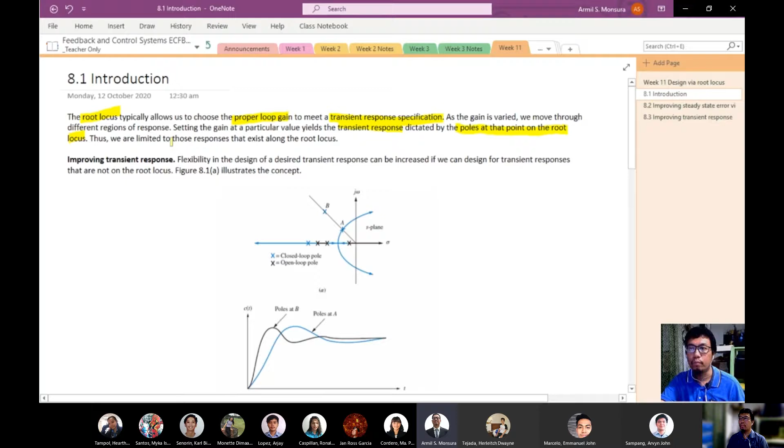However, setting the gain at a particular value yields a transient response dictated by the poles at that point on the root locus. So if we want to set our transient response at a different part of the S-plane, or set our closed loop poles at a point that is not on the root locus, we would not be able to do that. We are limited only to the root locus itself.

So, for example, if we look at improvement in the transient response, we will have the following, or we can see the following. For example, say we want to meet a certain settling time or peak time.

Now, if at a certain value of gain, the location of your pole is here, remember that your closed loop pole, you would only be limited in setting your gain along this root locus.

Okay, so halimbawa ngayon na gusto ninyong mag-meet ng certain TS or TP requirement yung inyong system, then you would be changing your overshoot kasi magbabago this line actually sets that, or along this line your overshoot is constant, or your overshoot is basically constant.

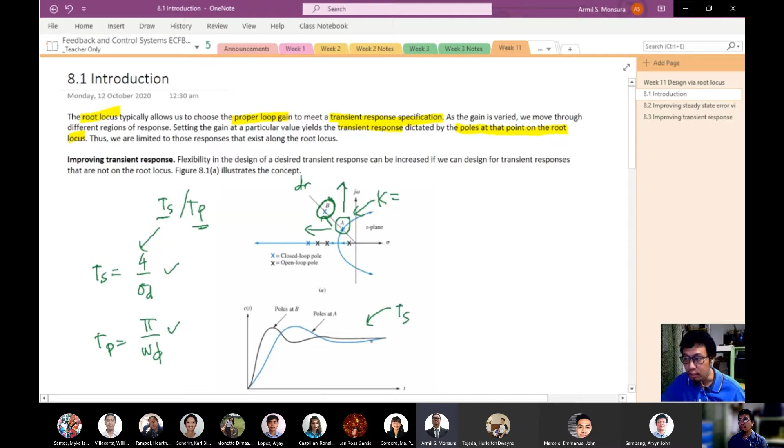Yan, for example, kung titingnan niyo to, in this case, there is an improvement in TS kasi ito yung TS nung sa A. Pero yung sa B, okay, nandito yung TS niyan. So nag-improve yung TS niyan, bumilis yung settling time. Pero makikita nyo na yung kanyang overshoot, halos pareho lang.

Okay, it is possible by moving from point A to point B. Okay, but again, as you can see, point B is not on the root locus. So paano natin ngayon mamimit yung ganong requirements na we improve TS but at the same time we maintain the overshoot?

Okay, so in that case, what we will do is we would need to have your root locus reshaped. Kailangan mabago natin yung shape ng root locus natin. And then, when we reshape your root locus, we would make that root locus pass through that point B. Okay, so hindi lang basta reshape. Pag ni-reshape natin siya, dapat yung bagong root locus na ni-reshape dumaan din sa point B.

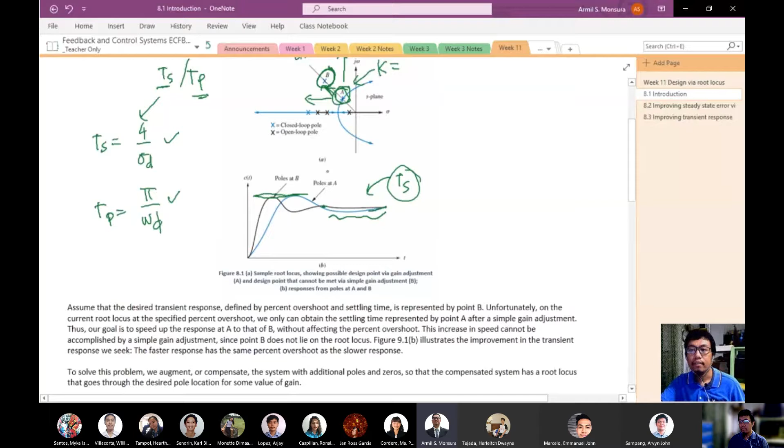And how do we do that? How do we reshape the root locus and then make the root locus pass through a certain point? By the way, tatawagin natin tong point B as the new operating point, and itong point A as the old operating point. So instead actually we can also call that as the complex dominant pole. Pero para mas suggestive siya, or para mas intuitive siya, we will call those operating points where your system is said to be operating on.

Okay, so basically that's the closed loop pole that your system operates on, so that mamimit niya ang certain, say for example, overshoot or certain damping ratio. And then i-redesign natin yung controller natin such that yung operating point na yan, magagalaw natin into a new operating point that would meet our requirements.

Okay, so babalik tayo sa question natin. How do we then move or reshape this root locus and at the same time make the root locus pass through a new operating point? So what we do is we augment, or compensate, the system with additional poles and zeros. So what we will do is we will add open loop poles and open loop zeros sa ating system. Yung open loop poles at saka open loop zeros na yun, doon manggagaling yun sa controller natin.

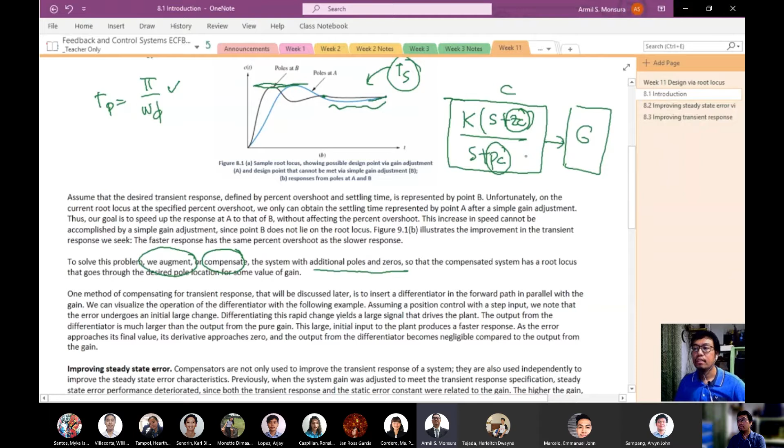Ang steady state error, basically, isang way of actually improving your steady state error is increasing the system type. Take note na halimbawa, if your system is a type 0 system, halimbawa meron kang K over S plus 1 times S plus 2. If you have this system na type 0, alam natin na meron yang error sa step input. Kung gusto nating ma-zero yung ating system or yung error natin o yung steady state error natin due to a step input, what we want to do is to increase the system type of this.

Gusto natin siyang gawing type 1 para magkaroon siya ng integration factor dito. And thus, ito magiging 0, kasi yung kanyang KP mag-i-increase yan up to infinity. So yung improvement na yun can actually be done by adding an integration factor doon sa inyong forward transfer function. So ito, ang mangyayari ngayon dyan is that yung ating controller meron na siyang gain, tapos meron pa siyang integrator.

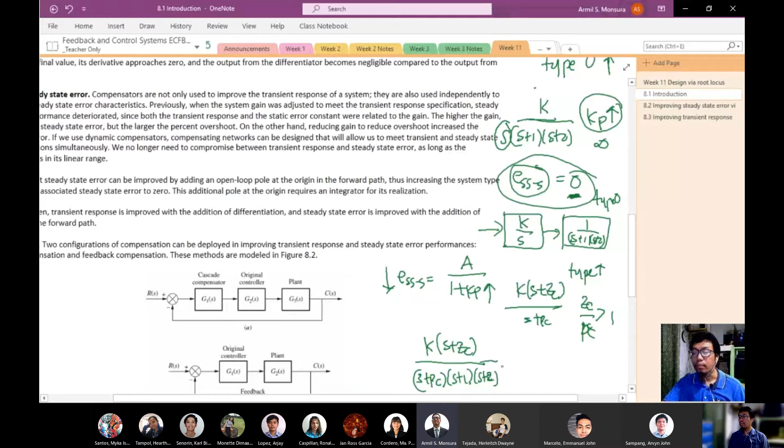Pag kinumpute nyo yung KP nito, that basically is K times ZC over PC times 1 times 2. So kung yung ratio na ZC over PC natin is actually greater than 1, then we can expect an improvement in KP and therefore an improvement in the steady state error performance of your system.

Now, what's a good thing is that mako-control natin kung nasan tong ZC at saka PC natin, so that hindi lang natin siya ma-state as greater than 1. But actually, we can actually set yung value na yan, itong value na to. For example, kung gusto natin ng 10-fold improvement in terms of the steady state error, or in terms of the static error constant, then we can set ZC over PC to be equal to 10, kung gusto natin ng 10-fold reduction, 10-fold improvement in the static error constant.

So kung 10 yung isa-set natin para dyan, then we can choose a location for your compensator zero at compensator pole para maging 10 yung ratio na yan. And therefore, pag kinumpute natin yung KP, there would be a 10 times improvement in the KP. And of course, in terms ng KP at saka ng steady state error for the step input, hindi kasi exactly sila proportional.

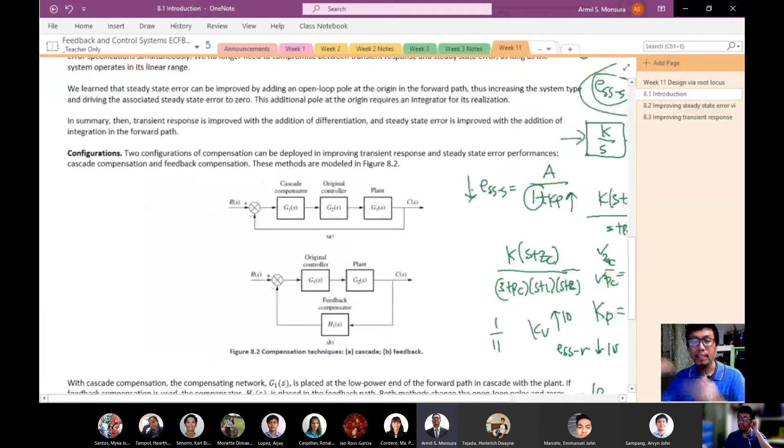Pero sa KP kasi iba yung usapan dahil merong extrang 1 na factor doon. Pero more or less medyo mape-predict natin na pag tinaas mo si KP, bababa si error.

That is how we improve the steady state error. Either we introduce integration factor so that we can reduce the error to 0, o kaya we can introduce poles and zeros, or compensator poles and zeros, para makita natin na ma-achieve natin yung improvement sa static error constant na kailangan natin. So yung mga techniques na yun will actually be discussed in the next sections nung ating chapter na to.

Yung configuration, mahalaga na magkasundo tayo dun sa configuration nung ating system na gustong i-compensate. Actually merong various techniques of doing compensation techniques na available.

Yung isa is yung cascade compensation na tinatawag, in which yung compensator ninyo is basically naka-cascade or naka-series dun sa ating plant. The other one is tinatawag na feedback compensation, in which yung compensator ninyo is ilalagay natin dun sa feedback loop.

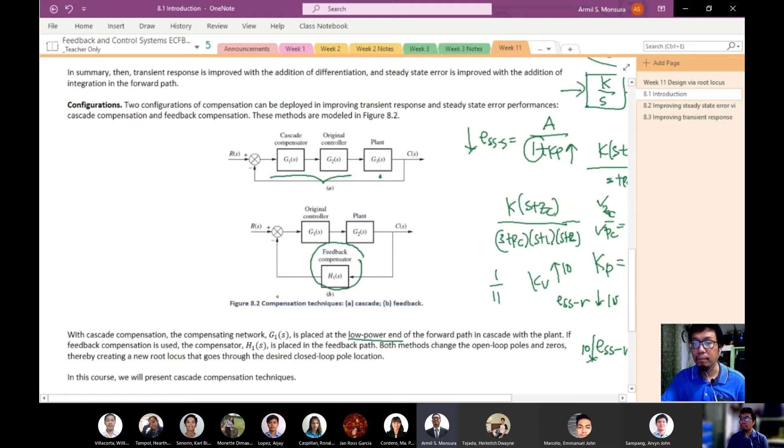Now, in this lesson, we will be limiting ourselves to cascade compensation techniques. And again, paulit-ulit ko na sinasabi sa inyo ito, yung tungkol sa topology na gagamitin natin. So again, we will be using yung topology na pinakita ko sa inyo before pa, in which ang i-design natin doon is yung compensator na nasa tabi ng ating plant.

Compensators na gumagamit ng pure integration for improving steady state error, o pure differentiation for improving transient response, ay defined as ideal compensators. Pwede natin gamitin yung ating pure integrator, okay, yung integrator at yung ating differentiator, to be able to improve steady state error para sa integration o integrator, at saka transient response para sa differentiator.

But these compensators are only implemented using active networks. Yung ating integrator, yung 1/s natin na system, at saka yung ating differentiator, yan ay na-i-implement lang in circuit using active networks. So mai-implement lang natin yan using op-amps.

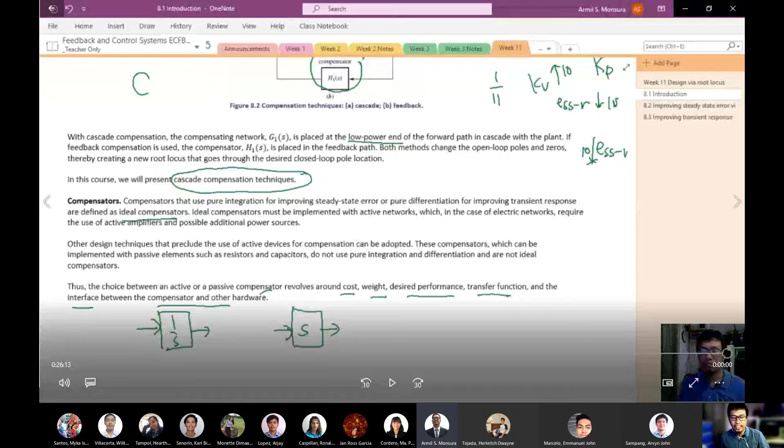Bago ko mag-proceed dun sa next part ng video, gusto ko lang bigyan kayo ng parang pinaka-preview kung ano yung aabangan natin dito sa next lesson natin na to. Basically, mag-aaral tayo ng design ng anim na compensators. Paano i-design yung anim na compensators? Para medyo may idea din kayo kung saan patungo itong discussion natin.

Ang hirap mag-drawing ng straight line sa ayan.

Tama ba itong ko? 1, 2, 3, 4, 5, 6.

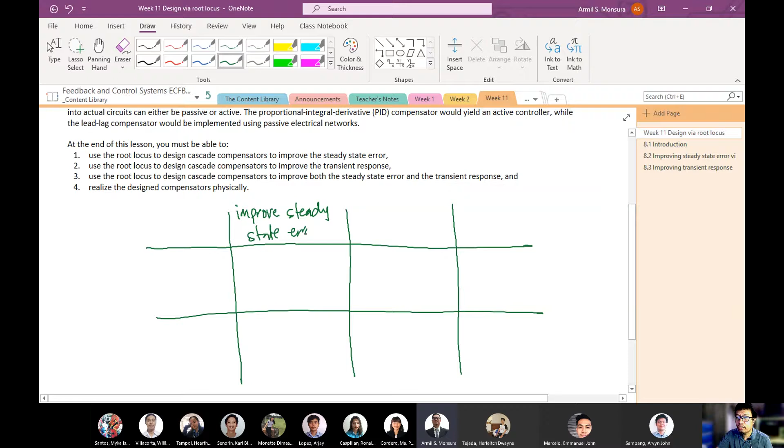Okay, so sa una, mag-aaral tayo kung paano i-improve yung steady state error. Tapos, aaralin natin kung paano mag-improve ng transient response. Okay, and then aaralin natin kung paano mag-improve ng sabay, steady state error plus transient response. Okay, so una, pag in-improve natin yung steady state error, yung transient response basically the same as the uncompensated.

Okay, so parang i-improve lang natin talaga yung steady state error. Pero yung transient response, kung ano lang yung original na transient response niya nung wala pa siyang compensation, yun pa rin siya.

Okay, sa improvement naman ng transient response, wala tayong pakialam kung anong mangyayari sa error. So generally, when you improve the transient response, there must be a certain improvement also in the steady state error performance. Magkakaroon din siya ng improvement, kaya lang hindi natin kontrolado. Okay, hindi natin controlled kung gaano kalaking improvement sa steady state error yung mangyayari.

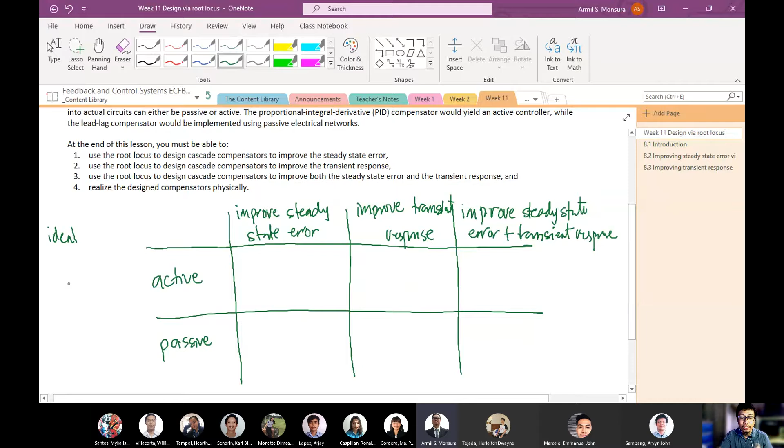Okay, tapos yung isa naman, type ng compensator na yan natin is yung passive. Okay, ito yung purely hindi siya gagamit ng op-amp, o kaya pwede siyang gumamit ng op-amp, pero yung characteristics niya hindi katulad doon nasa active, o hindi ideal yung compensation na magaganap. Okay, pag sinabi niyo kasing ideal yung compensation, ulitin ko, pag sinabi niyo ideal yung compensation, you are able to put in a pure integrator.

Okay, pwede kayo maglagay ng pure integrator o kaya ng pure differentiator. And when you say pure integrator, you are able to put in an open loop pole sa origin. Okay, pag pure differentiator naman, you are able to put in an open loop zero dun sa origin. Okay, so yun yung tinatawag nating pure integrator tsaka pure differentiator, at magagawa lang natin yan kung meron tayong active circuit. So yung ideal compensation can only be achieved via active networks. Okay, naintindihan yun?

Now, if your network or if your compensator does not require the use of integrator or differentiator, okay, pwede natin siyang i-classify under ng passive. Okay, again, pag hindi gagamit ng ideal integrator or ideal differentiator, yung controller ninyo or yung compensator ninyo, pwede natin siyang i-classify under ng passive. Whether or not gagamit siya ng op-amp, kasi may mga passive compensators tayo na gumagamit ng op-amp. Okay, gagamit siya ng op-amp pero hindi siya gagamit ng integrator or differentiator. Okay, so pwede natin i-classify yun under ng passive.

Now in this section, we will now try to improve the steady state error of feedback system using cascade compensation. Ang objective natin dito is basically we want to improve the steady state error without changing essentially the transient response. So basically, we will be having a system having an improved error performance, but having the same transient response as the uncompensated system. There will be two techniques na ating pag-uusapan. We will first discuss a technique wherein we will reduce the error to zero.

For us to do that, we would be using the ideal integral compensation. When you say ideal integral compensation, you would use an integrator - gagamit tayo ng pure integrator dito. When you use an integrator, you would be actually increasing the system type of your system. I-increase natin yung system type, so from a type 0 system, for example, magiging type 1 yan dahil magkakaroon na ng isang integrator dun sa forward path niya, or madadagdagan ng isang integration factor dun sa forward path niya. Therefore, the system type would actually be increasing. And again, if we have an increased system type, for the same test input, yung error mo mare-reduce bigla sa zero. So that's one way of reducing your error to zero. But again, the use of integrator would actually require you to use active circuits.

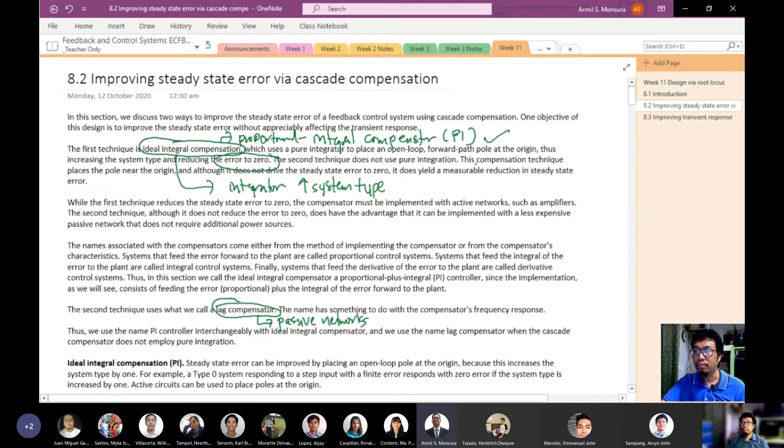Okay, the name of the lag compensator is actually stemmed from its property kapag tinignan niyo yung kanyang frequency response. Another name that we can use for the ideal integral compensator is yung tinatawag nating proportional integral compensator, or PI compensator. Kung maalala nyo, binanggit ko sa previous section na meron tayong PID or proportional integral derivative compensation, o controller. Dito, ang gagawin natin is isa-isahin natin siya: proportional integral, proportional derivative, at yung tatlo, proportional integral derivative. So yun din yung tawag natin, yun din yung ideal integral compensator natin. So we will discuss both approaches, itong PI compensation at itong lag compensation, and see how they can actually improve yung ating error performance.

Okay, sa ideal integral compensation o sa PI compensation natin, the steady state error can be improved by placing an open loop pole at the origin, basically because it would increase the system type by 1. At saka, kasi what would happen is that pag naglagay kayo ng open loop pole sa origin, that would also change the shape of your root locus.

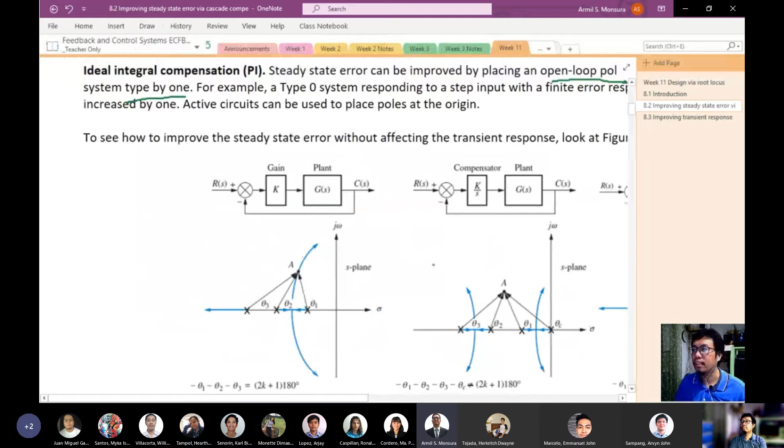Okay, so ngayon para bumalik siya sa dati at para yung root locus ninyo would actually operate on the same operating point na meron siya before the open loop pole was added at the origin, lalagyan natin siya ng open loop zero na malapit dun sa open loop pole na nilagay niyo sa origin. So that would mean na since malapit yung open loop zero at saka yung open loop pole, magkakaroon yan ng tinatawag na pole zero cancellation. I'm talking about this part. Kung halimbawa na ito yung original operating point niyo or your system operates at that complex pole, once na maglagay kayo ng open loop pole sa origin para i-increase nyo yung system type, may iba yung shape ng root locus niyo. So ito na yung dinagdag na compensator pole.

So may iba yung shape, mawawala dito sa part na to yung root locus niyo. Ibig sabihin, may iba na talaga yung performance niyo kasama yung transient response. At again, ang objective nga natin is for us to just correct the error and not change the transient response. Pabawiin natin yan by actually placing an open loop zero na malapit dun sa open loop pole na nilagay natin sa origin. Kasi kapag naglagay kayo ng zero na malapit dito, essentially, you are employing yung tinatawag nating pole zero cancellation. Itong dalawang ito cancels each other out. So therefore, sa root locus, hindi masyado mararamdaman yung pagkakaiba ng epekto ng dalawang yan, kasi halos nagka-cancel sila with each other. Therefore, yung shape ng root locus nyo, babalik sa dati.

At then, ma-force ninyo o ma-set ninyo ngayon na yung system ninyo to actually operate back on this point A. So, for us to be able to design yung ating compensator, para sa transfer function essentially of a PI compensator, okay, o an ideal integral compensator, meron kayong gain times s plus zc, divided by s. Yan yung transfer function ng isang proportional integral compensator. So i-take note nyo yan, kasi later on, kapag sabay-sabay yung dinidesign natin, baka mahirapan na rin kayo hanapin kung nasan yan. So sana meron kayong naka-ready na summary dyan. Maliwanag yun?

Okay, so let's continue.

So s represents the open loop pole at the origin, and zc must be an open loop zero that is close to the open loop pole at the origin. So the value should be close to it. If your pole is at 0, the value should be at 0.1 or 0.01. The nearer that zc is to the origin, the closer your performance will be to the transient response performance of the uncompensated system, but at the same time your error is reduced to 0.

So we now take a look at an example to see clearly what the effect is of placing an ideal integral compensator, or a PI compensator, on your system. So first, in this case, we'll use the CSD app, or the Control Systems Design app of MATLAB.

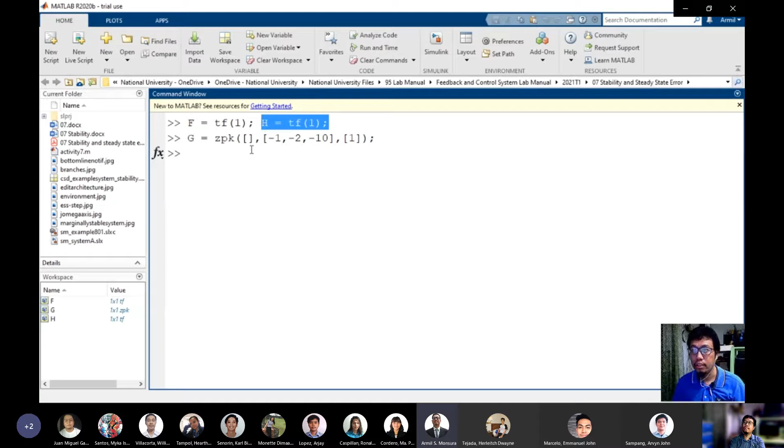So we started with defining your system in the MATLAB workspace. So our F is 1 - I explained this over and over again before - our F is 1, our H is 1, then this is your forward transfer function. That excludes k, because the k we will place in our controller design.

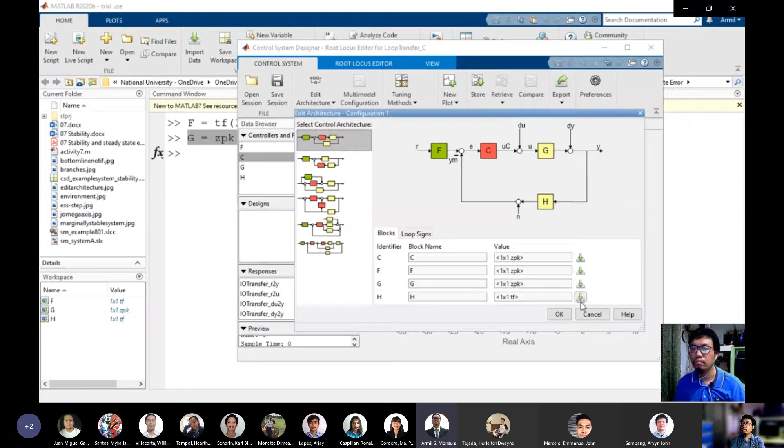So what we will do next is to import this into our CSD app, by choosing edit architecture, then editing this edit architecture. Once this pops out, we import F, then import G, and then finally import H. So we press OK, and then we wait for the system to update the architecture.

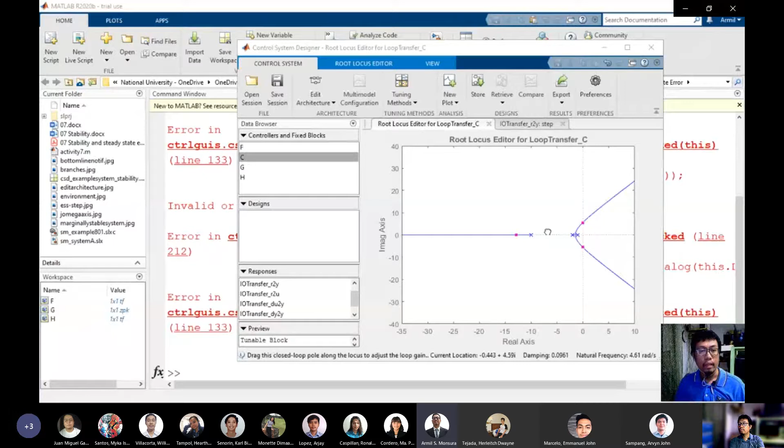So we now have the following as the root locus of your system. Take note that we have open loop poles at -1, -2, and -10. So we expect that we have three branches. And then what we want to do next is find the operating point.

Now the operating point is set by the given damping ratio. Our problem states that we want this system to operate with a damping ratio of 0.174. That means your complex poles would be along the damping ratio line of 0.174. So we can set that here.

By having your design requirements - right click, then design requirements, then new. Then we set the damping ratio at 0.174. We press enter so it registers, then click OK. So this is where the intersection of this damping ratio is - this is your damping ratio line, your DR line.

So we would want now to find the operating point. We would like our closed loop pole to be on the damping ratio line. So what we'll do is set the pole on this DR line. So we drag it there - this is our closed loop pole, the pink dot. We drag it towards here.

Until it intersects, so we check that our damping ratio is now at 0.174. So let's make sure that they're really intersecting. Just a bit more. So let's say that's the intersection we're looking for.

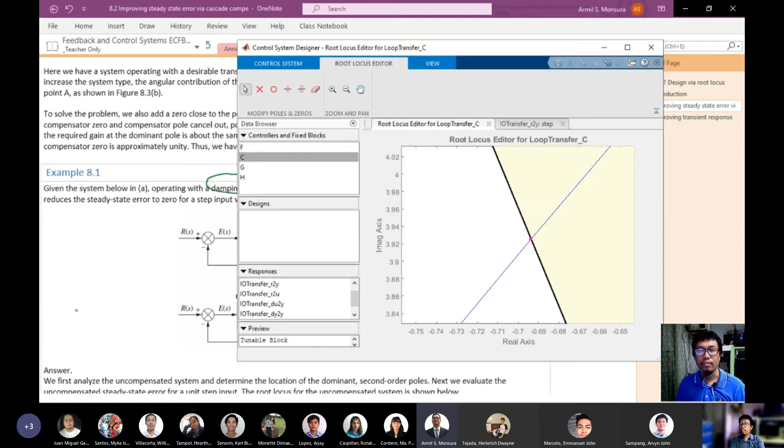So let's take note of the current location that's indicated. So in this case, the current location of our pole is at negative 0.694 plus or minus 3.93j. This might be different from our lecture because of course the actual work we're doing now is different from what I did before. Here I got it at negative 0.694 plus or minus j of 3.92, so that's 3.93.

So let's assume I'll be working on this actual one, what I'm doing now. In that case, anyway, the difference between them is small. That's it.

Konti lang naman yung difference nila. Okay.

So yeah, so we have it at, ipagpareho na natin siya. Okay. So this is negative 0.694. Negative dito kasi naka-positive siya, so let's make this negative. Okay, so this is negative 0.694 plus or minus J 3.92. Okay, so again, ang damping ratio niya 0.174.

Okay. Now for that location, we take note that the gain, okay, that the gain of your is at 164.44. Okay? So nasa 164.44 yung ating K. Okay? So in that case, we would be able to compute now the static error constant for that.

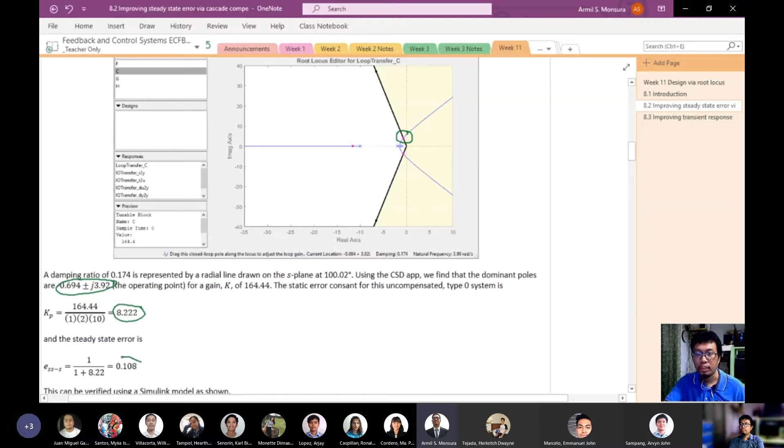Alam ko saan ko kinuha yung formula ng KP.

Naintindihan kung paano ko kinompute yung KP para dito? Oh, ayun. Saan ko kinompute, saan ko kinuha yung formula ng KP? Or in the first place, paano ko nalaman na formula ng KP ang gagamitin ko?

Okay. Tapos, pero paano ko muna nalaman na KP yung kukunin ko? Kasi tatlo yun eh, KP, KV, at saka KA. Paano natin nalaman na KP yung kailangan kong kunin?

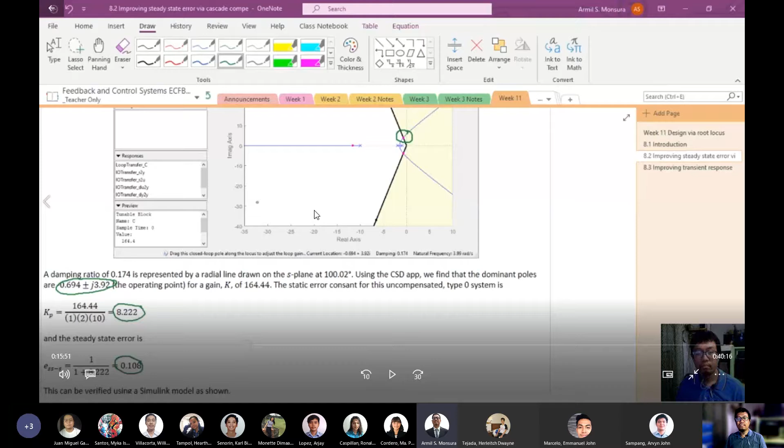Okay, so that's it. 0.108 is our error. So we may be able to verify that with a Simulink model.

So what you can do here is export this model. Once you've done this, you can actually export the model as, or create a Simulink model out of this.

Also, don't forget to export the tuned block. Let's export it as CU. So let's check this, the model C. Let's export it as CU for the uncompensated controller. So let's export it.

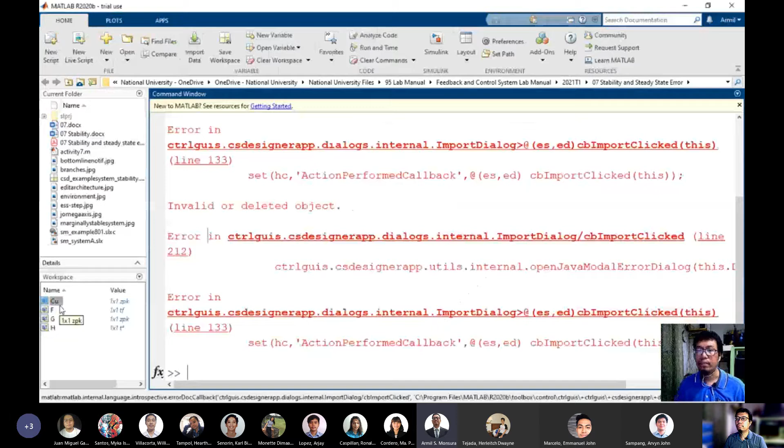And then let's export this as a Simulink model. So it would ask something like, do you want to, doing so will overwrite any variable in the MATLAB workspace with the same name. So let's just let it overwrite itself, since it's all the same anyway.

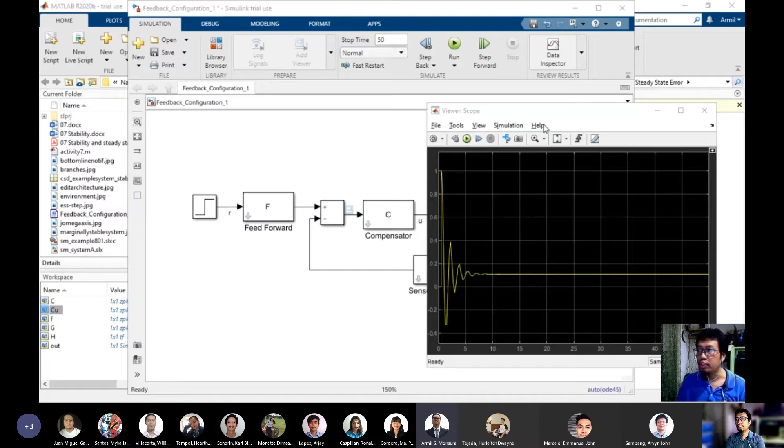So there. So these are the results of our simulation, in which now let's measure the steady state error from here using the cursor measurements.

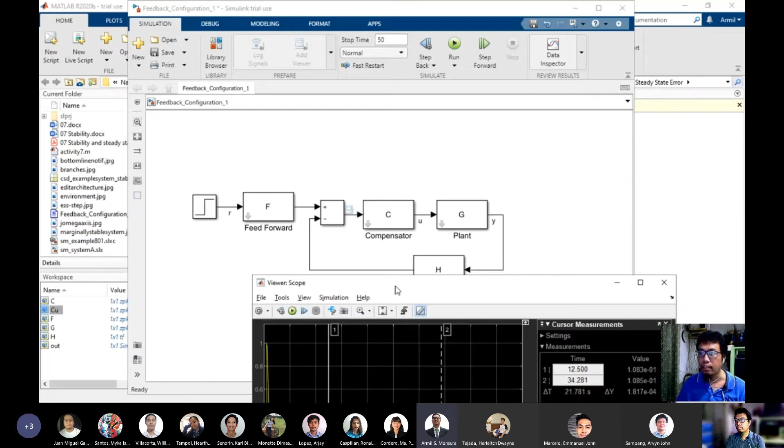You'll see here in our block or in the model that this viewer actually probes the error signal. So this is the error signal, in which we are now on the steady state part of our error signal, and we measure it using cursor 2.

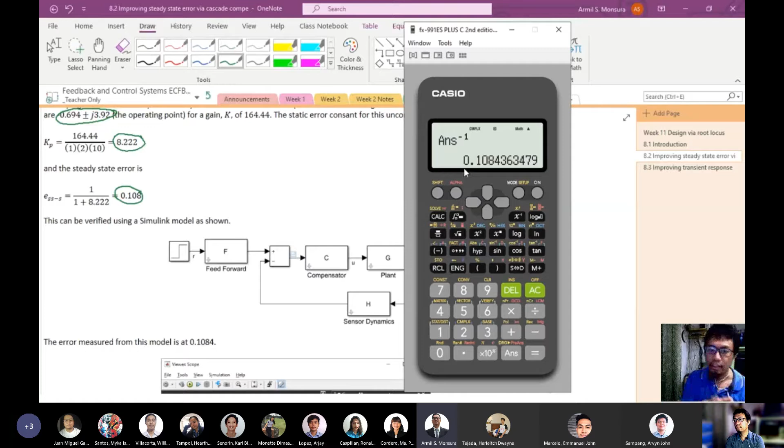So we see that what we measured is 0.1085. The computed error we got here is 0.108, or actually it's 0.1084. So pretty close, our computed value and our measured value.

Okay, so that's it too. Now, what we will do now is we will try to compensate the system by placing a compensator zero at 0.1 and a compensator pole at the origin.

So again, in terms of root locus, that would serve as, the pole would increase the system type. And then the zero here would actually cancel the effect of the open loop pole on our root locus.

So essentially, returning the root locus back to its original form. So we do that by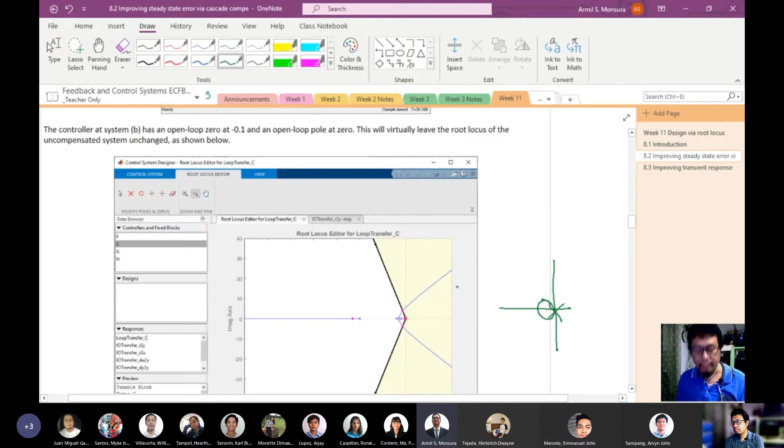going back to our CSD app. So let's zoom it again. Let's zoom out.

And then let's edit the compensator. So in this compensator editor, let's add an integrator, which is basically the pole at the origin, that's an integrator.

And then let's add, right click again, let's add a zero, a real zero. And let's change the location, let's set its location to negative 0.1. So press enter, so we'll have a zero there.

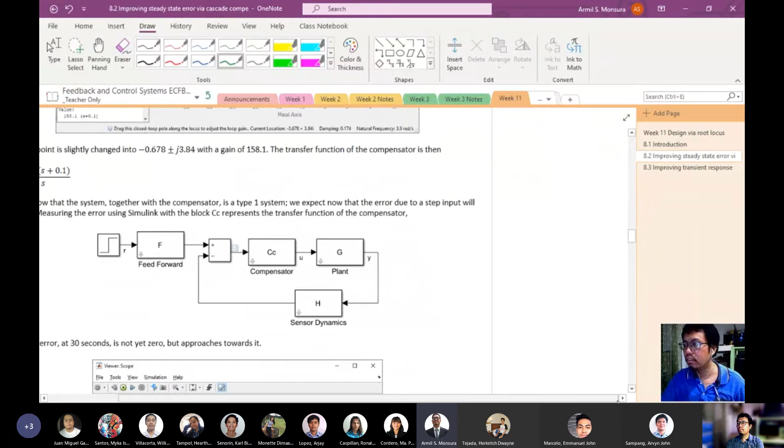Let's make a new block here. Okay, so this is 1. Then this is 158.1 times S plus 0.1 divided by S, that's your C. And this is 1 over S plus 1 times S plus 2 times S plus 10. And then this is 1, our feedback. Negative, positive, this is your C.

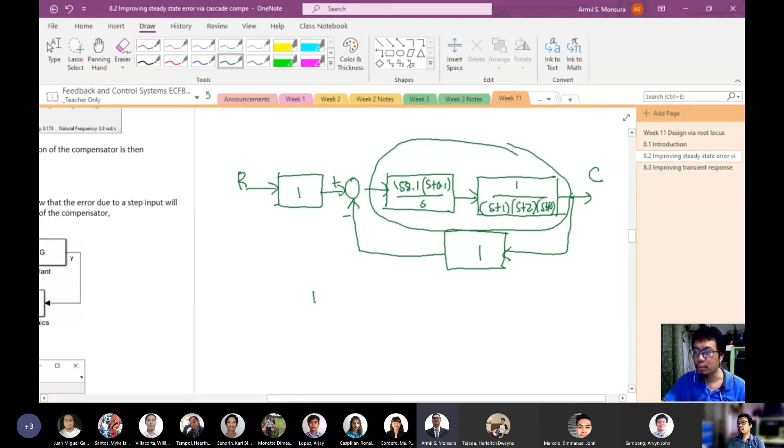Now take note that when we combine this, since this is the forward transfer function combining the two, we would be able to note that it becomes 158.1 times S plus 0.1 divided by S times S plus 1 times S plus 2 times S plus 10. Take note that the system type increased because it now has a pure integration, so it became type 1.

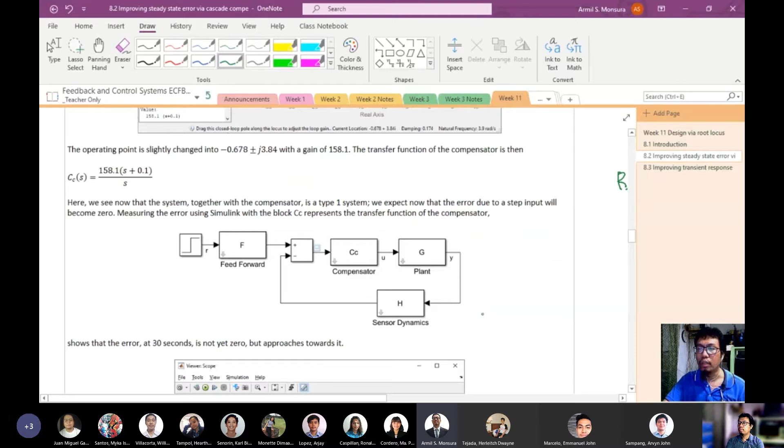So now we expect that when we measure the error, if you verify this now using Simulink, you will be able to see that the error is actually 0. In our measurement here, it hasn't approached 0 yet, but you can see the error going down. So we're expecting that after some time the error will totally become 0.

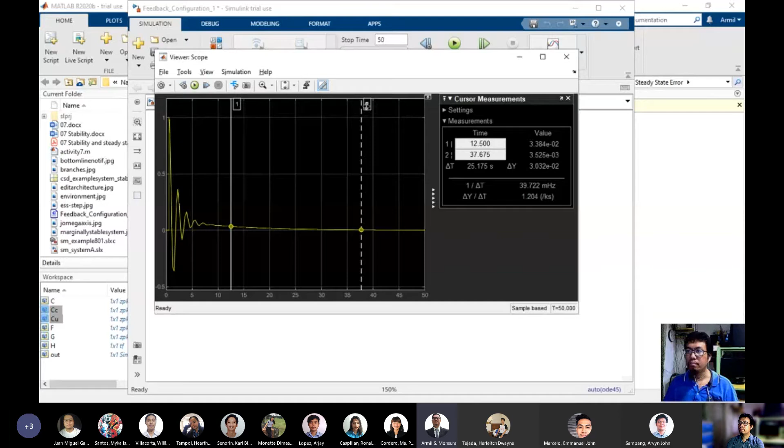Here's the thing, we really do not expect the error signal to completely become zero, since these are actual systems. So if you really look at the actual system, the error doesn't truly go to zero. But the fact that we see in our simulation that the error is actually approaching 0 means we are heading toward the point where the error truly becomes 0.

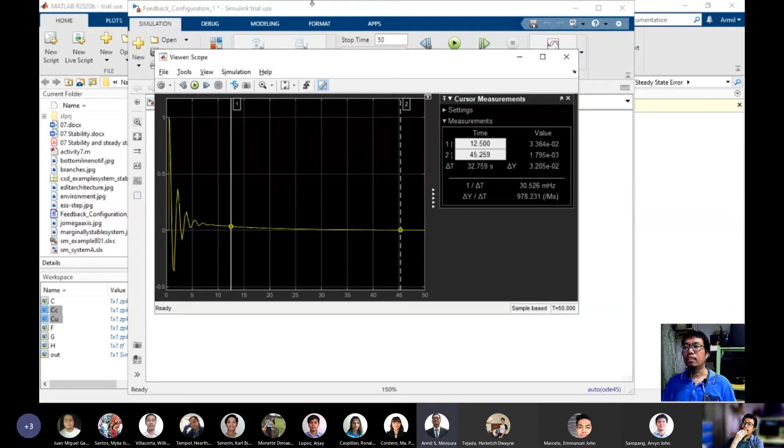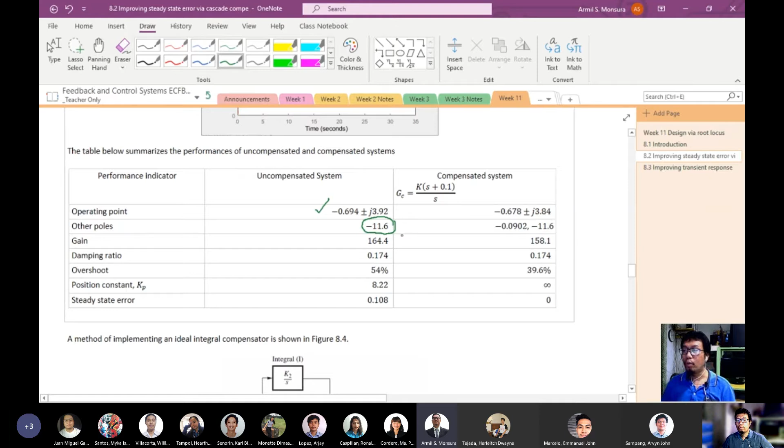We expect another pole which is at negative 11.6. You can get that if, for the uncompensated system, you put your cursor at that point, you would see that you get negative 11.6 as the third pole. And on the other side, we see the other poles are at negative 0.0902 and negative 11.6.

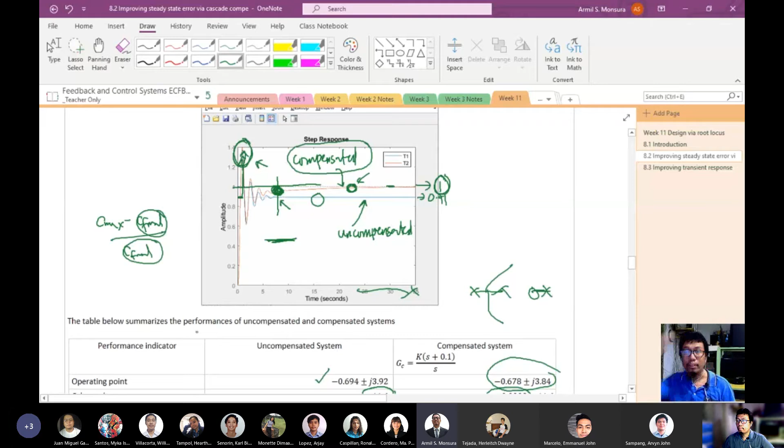Now the position constant, KP, is essentially 8.22 for our original. It becomes 8.222 for our uncompensated system. So that's 8.222, and it becomes infinite for the compensated system because we now have an integration factor in the forward transfer function, so it becomes infinite. Which means your error is now reduced to 0, from 0.108 it becomes 0.

That's how we compare performances of the uncompensated system and the compensated system. Now, how do we implement an ideal integral compensator? In terms of block diagram, you can implement it using a parallel combination of a pure gain and an integrator block.

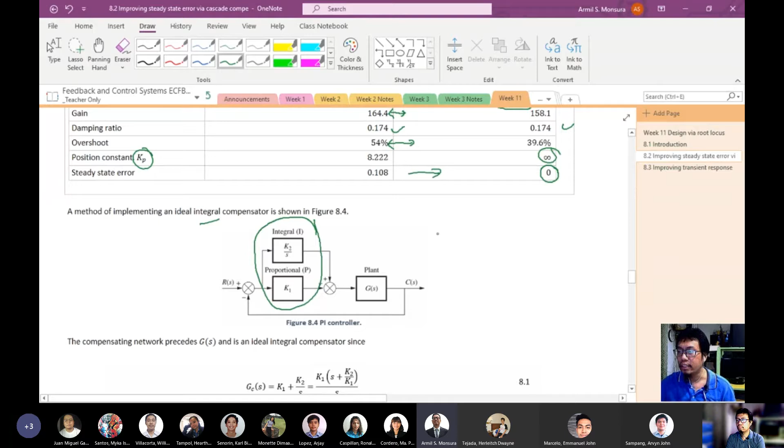What we got is basically 158.1 times S plus 0.1, divided by S. So now here you have basically this, this is it. The K we use here to describe the gain is basically this. But if you do it in parallel, to get individually the K1 and K2, we spread it out. So basically this should be 158.1 over S, plus 15.81.

Wala pa lang over S to. Kasi S over S, magka-cancel out sila. So 158, that is basically just 158.1. Plus 15.81 over S. Ibig sabihin, meron kang pure gain na 158.1, tapos meron kang integrator gain na 15.81. So that's how we implement it in a block.

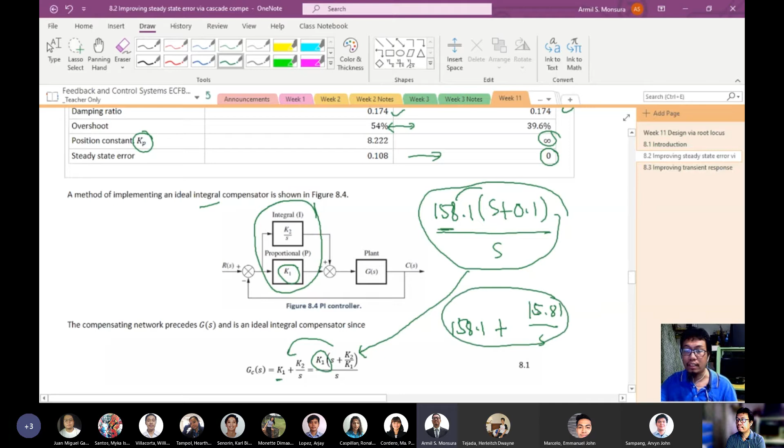Later on, we will be able to implement this in a circuit. Meron tayong table na gagamitin para malaman natin kung paano natin i-translate itong transfer function na to sa isang active circuit. So that's how we design your proportional integral controller.

Now the next, may question doon sa part na yun para sa proportional integral controller. Okay, so mukhang wala naman. Okay, so let's continue. Andiyan pa ba kayo? Baka mamaya wala na kayo diyan. Okay, so sige, tuloy natin.

Pang-correct natin or pang-reduce natin ng error is yung tinatawag nating lag compensation. So dito sa lag compensation, hindi natin ma-achieve talaga yung zero error, kasi hindi tayo makakapag-implement ng integrator without the use of active circuits. So kung purely passive circuits lang yung gagamitin natin, hindi tayo makakapaglagay directly ng pole sa origin, kaya medyo iuusad natin ng konti yun from the origin.

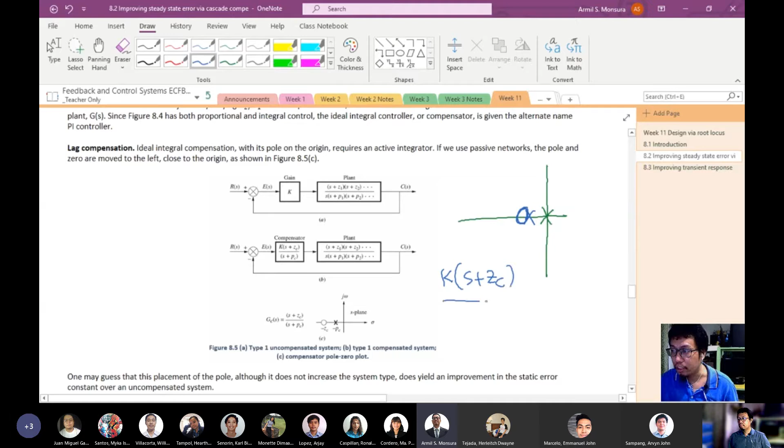Ang makikita natin dito is that kung meron kang active integrator, makakapaglagay ka ng pole dito. Pero this is not possible kung meron kang passive circuits lang, so medyo ilalagay natin siya ng konti dito. Tapos the principle is, medyo i-cancel natin siya using a zero na malapit sa kanya. So that is why, kailangan natin when we design a lag compensator is kailangan natin mag-specify ng compensator zero at saka ng compensator pole.

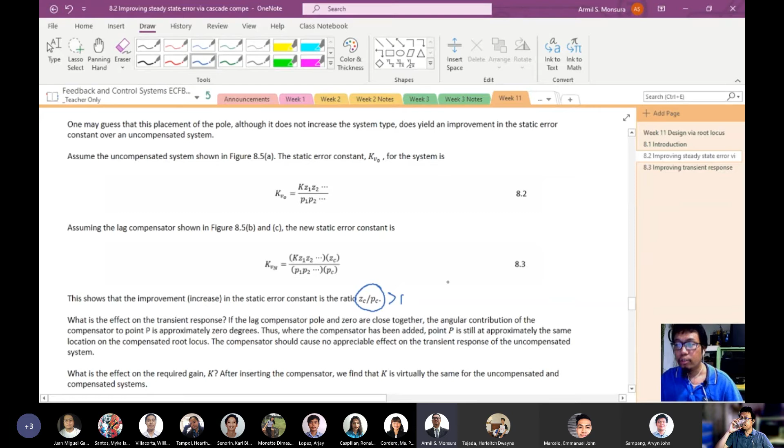Ang requirement nito is that we would like our ZC and PC to be as close as each other, pero kailangan yung ratio ng ZC over PC natin ay greater than 1, kasi yun yung magiging improvement natin. This would be the improvement that we need in order to increase the static error constant, and therefore decrease the error. So again, we say na yung ZC over PC is the improvement in the static error constant na we require.

So that we would be able to increase the static error constant by this factor, and therefore we would be decreasing the error, we would be reducing the error by a certain factor. Kung ganun, ibig sabihin nito, dapat si pole natin mababa to sa 1, kailangan medyo malapit to ng konti sa origin, kasi dapat mababa yung value niya. Kung mababa yung value nito kesa dito, what would happen is yung ratio nila would actually be greater than 1. Say for example, kung ang pole ninyo ay nasa 0.1, ilalagay natin ito as nasa 1.

So we will have a ZC over PC ratio natin, may improvement na tayo sa error natin. Yung pole natin, medyo malapit sa 0, malapit sa origin, tapos yung zero natin nasa 1, so nasa kaliwa siya ng compensator pole natin. As this goes near the origin, mas malapit siya sa origin, mas mapapaliit pa natin to. So dapat mas malaki si zero kaysa kay pole, tapos si pole dapat mababa sa 1 at malapit siya sa origin. Yun yung requirement ng transfer function natin dito, ng compensator zero at compensator pole natin.

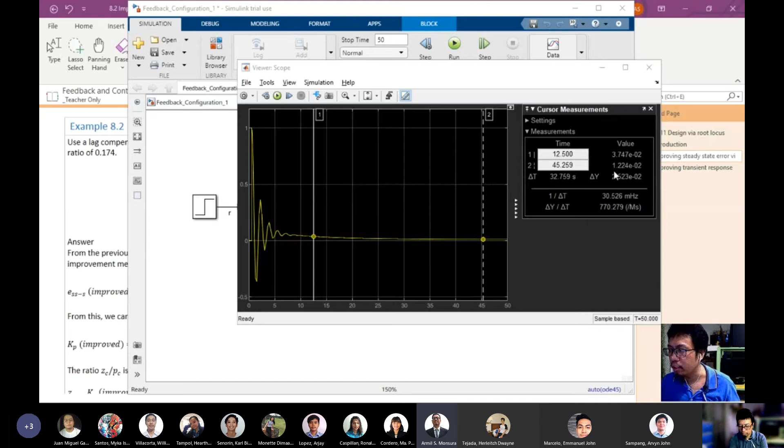So from this measurement, again using the cursor, I'm looking at cursor 2 because this one is more settled, more at steady state. The error is 0.0122. Compare that to 0.0113. So the error that we measured is 0.0122.

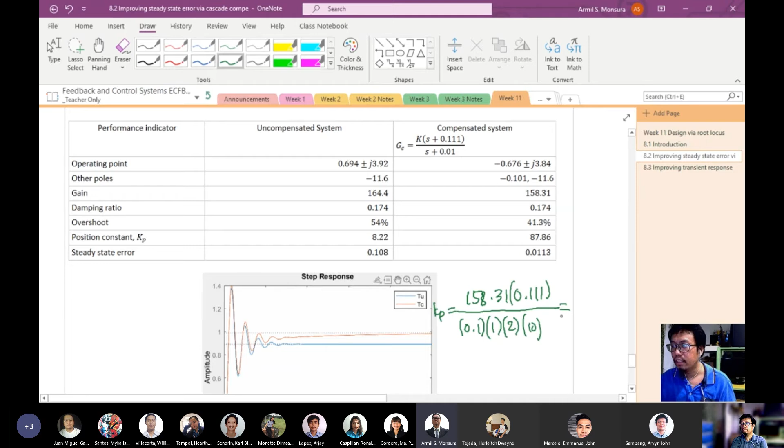Now if you actually compute it, when we compute this, our KP becomes 158.31 times 0.111, okay, divided by 0.01 times 1 times 2 times 10. That would be our KP. So when we compute that, that should become 158.31 times 0.111 divided by 0.01 times 1 times 2 times 10. So 87.86.

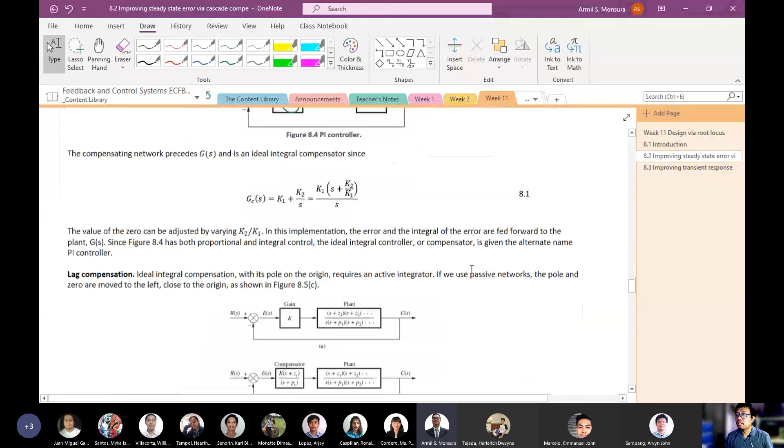Basically, because your system already has compensation, what happens to your forward transfer function is this: your compensator has the transfer function 158.31 times s plus 0.111, divided by s plus 0.01. That's for this part. Then your plant is this. So when we cascade them and look for KP, since KP is basically the limit of G as s approaches 0, that G is basically your whole forward transfer function.

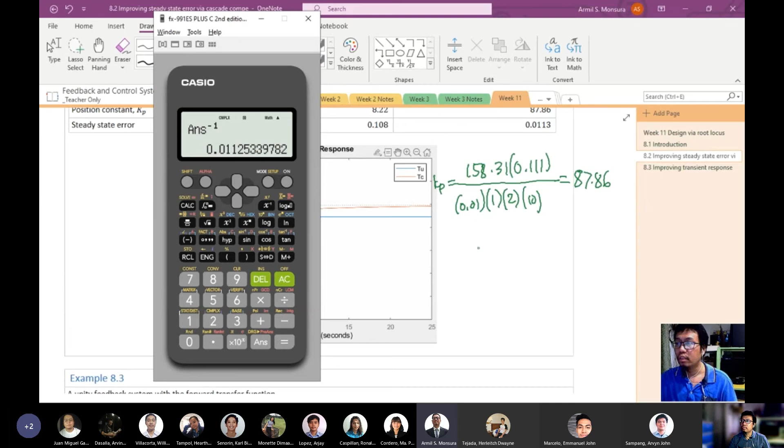So when we fully compute the error, it's KP plus 1, and then we invert it. Your error is 0.0112, that would be your steady state error for a step signal. So our target is 0.0108. That's the computed value. And our simulated or measured value from the simulation is around 0.0131.

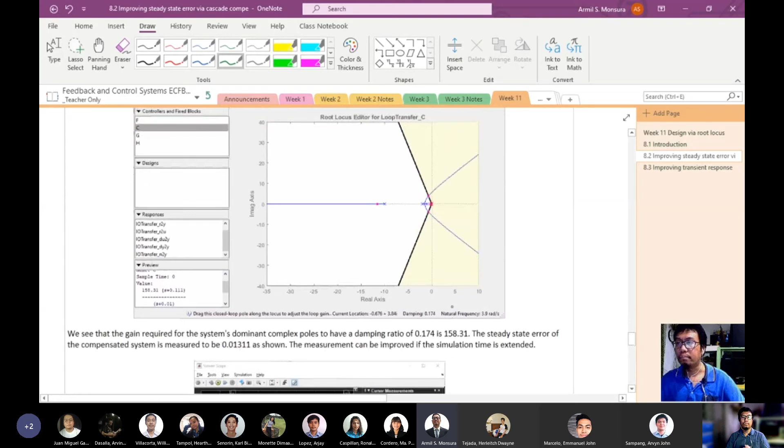So again, when designing a lag compensator: arbitrarily choose the pole location, and choose the pole to be near the origin. Then from there, compute the required location for the zero using the improvement in the static error constant, ZC over PC — this is the improvement for the static error constant. So first pick where PC is, it should be close to the origin. Then compute ZC equals the improvement in static error constant times your PC, and from there verify your design. Again, this improvement constant means the ratio, or how much you need to raise the static error constant from the original to the required value.

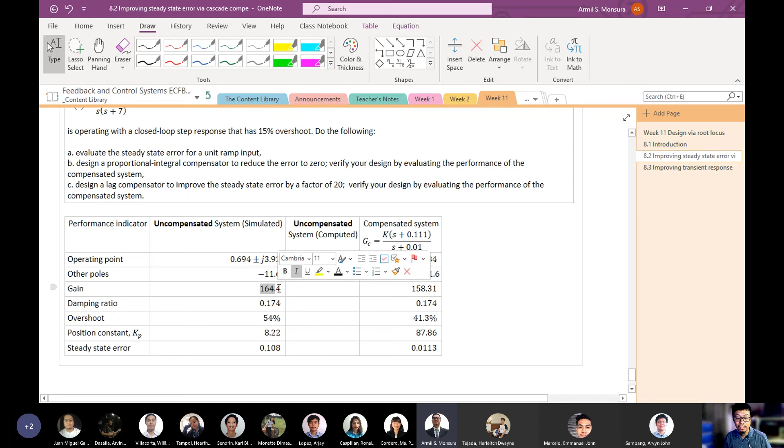This gain can be computed and at the same time simulated. There is a way to compute it. For example, I can get the computed value for this gain by substituting this into my original transfer function. For this case, the transfer function is 1 over (s plus 1) times (s plus 2) times (s plus 10).

Then I calculate it using this: 0.694 plus 3.92i. Then I get the magnitude of that, which is 4.322 times 10 raised to negative 3. So now the k is this: 4.322 times 10 raised to negative 3, the reciprocal of that, since 1 over the magnitude of g is equal to k, based on our previous lesson.

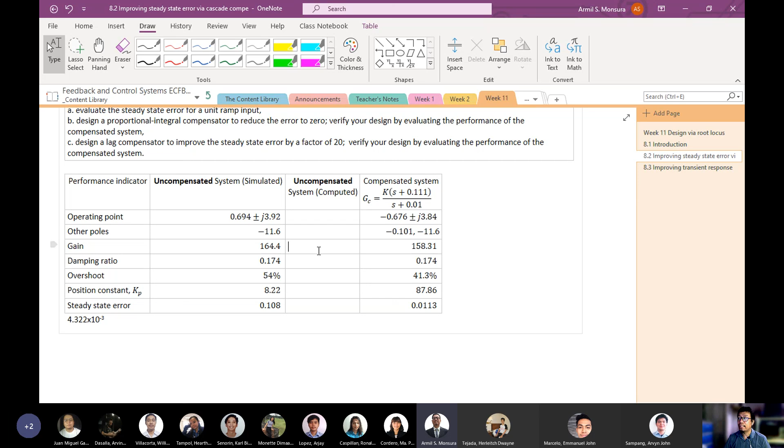The next lesson is about improving your transient response via root locus, where you will design a proportional derivative and a lead compensator. There's already material for this. I'll upload the recording later and include it in our next session.